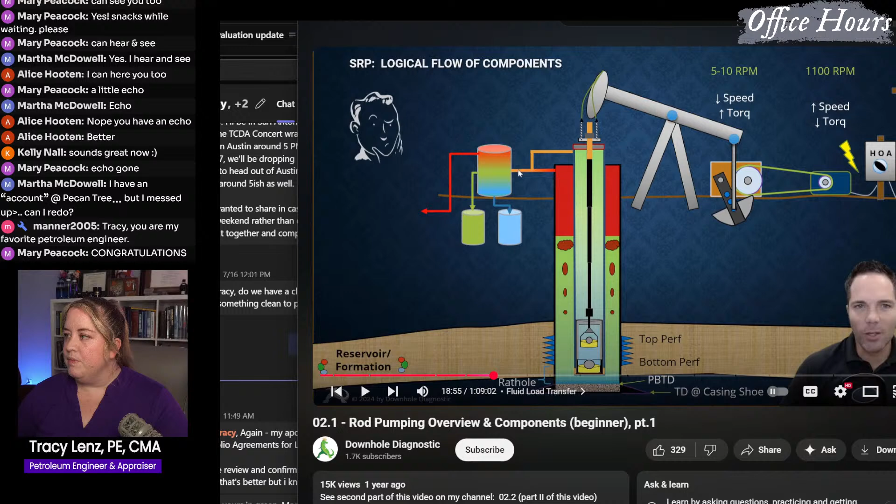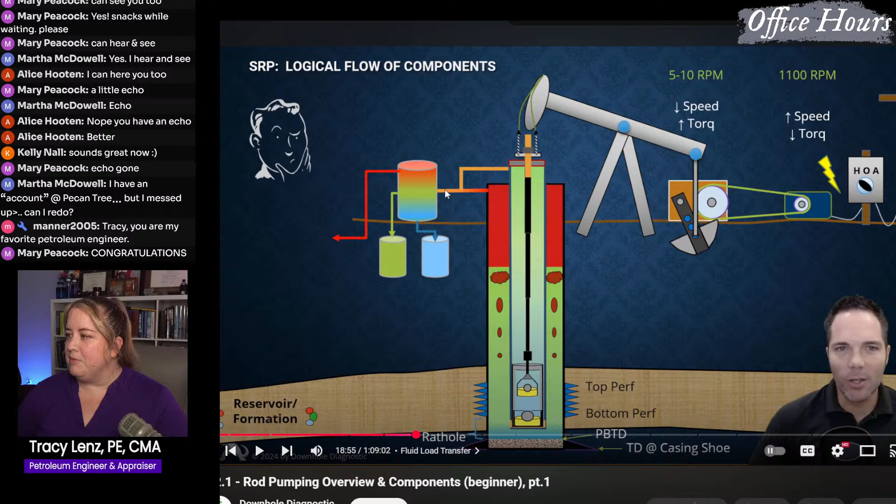Okay, so let me just arrange this. This is from Downhole Diagnostic, that's the name of the channel this is from. I'll keep that little thing in the bottom just for credit purposes, but this is the highly technical version, and I like some of their diagrams so I thought I would go ahead and show it.

Let's see, just so y'all know what we're talking about, if you've never seen it before, I'm going to mute him so it doesn't show up. This is the pumping unit we're talking about. This is a particular type, but there are a lot of different types. Here's an animation.

If you're driving around, you might see this along the highway a lot of times. If you're driving from Austin to Houston, around Bakersfield, California, Oklahoma, anywhere in West Texas, you're going to see these things. These are pumping units. I hear a lot of people call them rigs, but they aren't rigs, this is a pumping unit.

Sometimes they're also called a rod pump, a pump jack, horse head, beam unit, artificial lift. There's a lot of different names for something like this. Reciprocating rod lift is apparently another word for it.

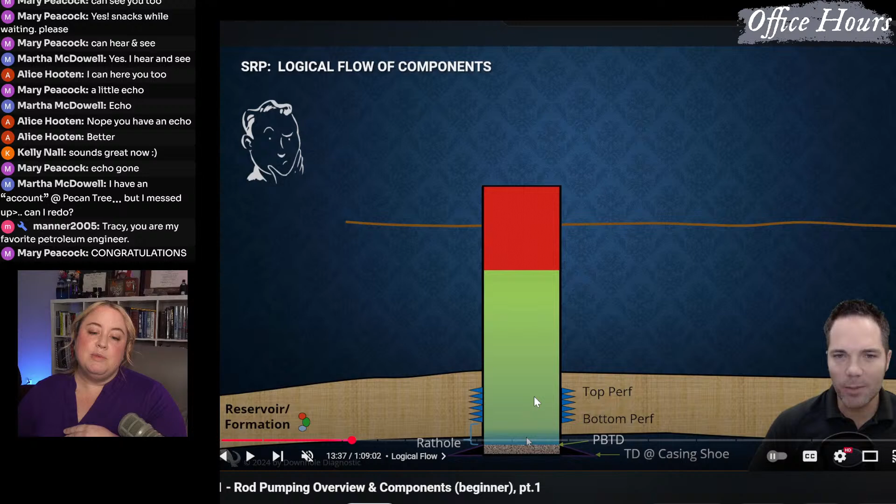So the problem is that this oil is too heavy to get to the surface on its own. It's not just going to magically start gushing unless there's enough pressure behind it to push it up. A lot of times you do have oil gushing to the surface, like in Beverly Hillbillies, because it's either really close to the surface and doesn't need a lot of pressure, or there's a lot of gas in the fluid, and gas is super light.

If you think of opening up a Coke bottle, you shake it and open it, it's going to burst, stuff starts gushing out of the top because there's more pressure in there than the stuff around it is able to hold in, and once you pop a hole in it, it's going to start gushing.

But not every reservoir is like that. And especially if you continue with the Coke bottle analogy, if you let it slowly release that initial part, the entire bottle is not going to be empty when it stops gushing. Maybe the top 10%, 20% of the bottle will be empty, but the rest of it will still be there.

So in order to get the rest of it out, if you can't move the Coke bottle, because in this analogy that's the earth, right, you can't tip the earth over, the next thing you might do is put a straw down there. You put the straw in and you're able to suck up the Coke, and that's how you drink it. I guess that kind of gives away that I'm from the South, calling every soda a Coke, but I don't really drink Coke.

But that is what we're doing here, we have this soda, this box here. If you think of this box as being the soda bottle that has already been popped, all the pressure's off of it, and now you just have this soda bottle sitting there, with the gas on top of the liquid, and you're trying to get the liquid out.

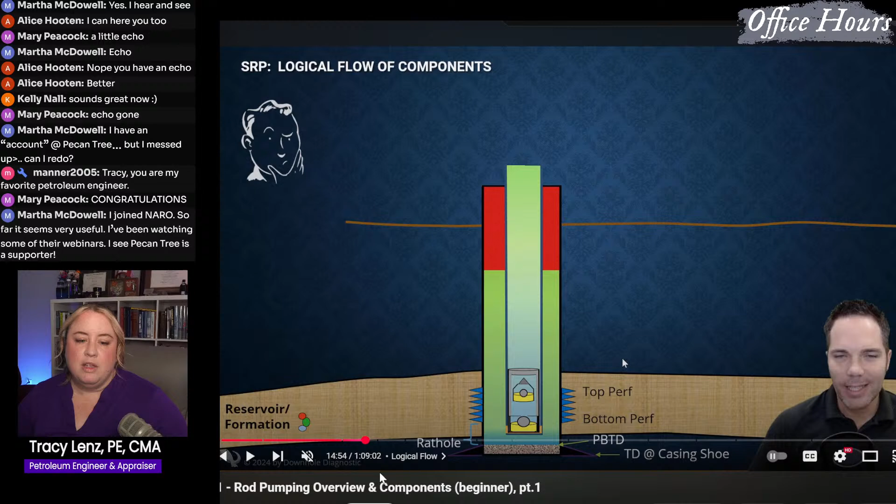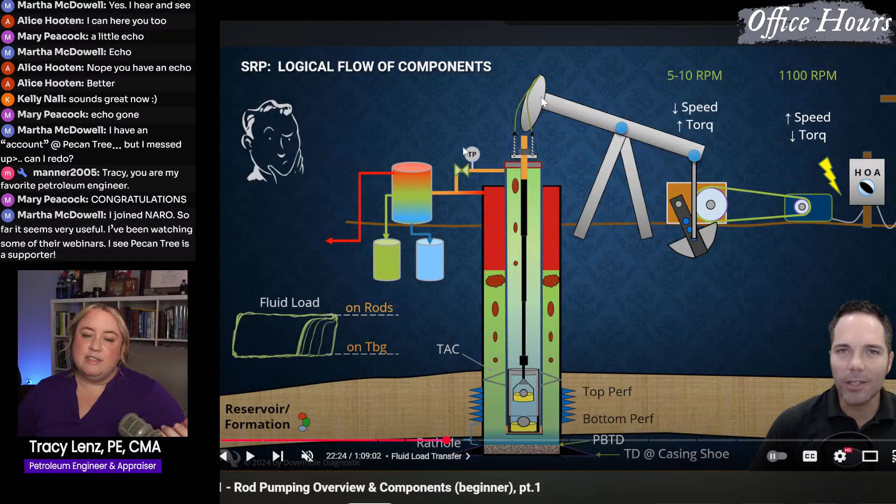So let's see if, I think I did see an animation. Here's everything all in there. So what this is doing is when the horse head goes up and down, and that actually is called the horse head because it looks like a horse, it is moving the entire string of rods that's going down into the ground and down to that pump at the bottom. It's moving all of that.

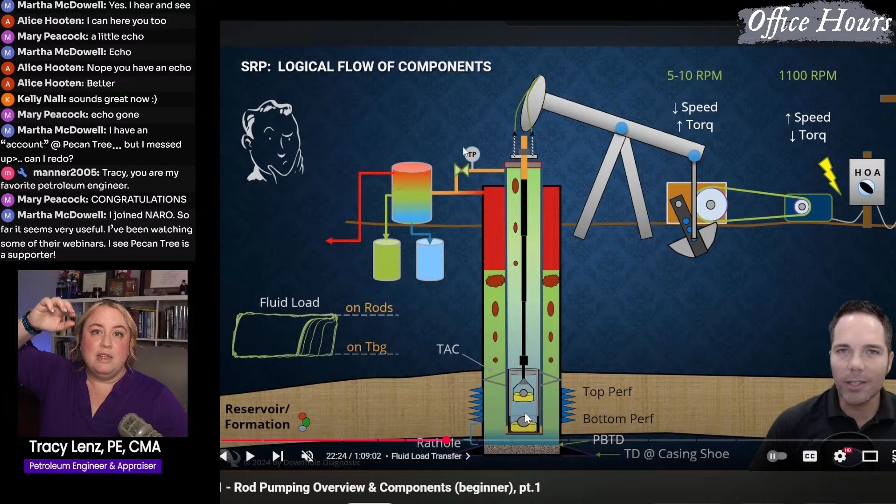So there's like 10,000 feet of things moving in the ground sometimes. Sometimes it's only a couple thousand feet or 1,000 feet. Usually the bigger this horse system, the bigger the pump jack is on the surface, the more it's moving, either more fluid, more weight, or both. And the smaller it is, that usually means it's just coughing up a little bit of fluid now and then, those little tiny ones that are smaller than a Volkswagen.

So you want to put it down into the fluid. This is moving up and down, suctioning up liquid every time it goes down into this pump. It suctions up more liquid, which comes up to the surface and goes to the facilities that are at the surface that you can see.

Here's the pump jack, usually connected to a motor, which is the thing moving this. Usually these things are electrified if it's in a very populated, lots-of-wells area. But if it's out in the middle of nowhere...

For example, there's a guy on YouTube who, if you found this video, you might have found his stuff too. I think his name's Zach, but he's in Oklahoma and he maintains his own wells. I bet most of his stuff is not electrified, there's not power lines going out to it, so it's just running on a generator, burning fuel to run an engine, kind of like just having a car idling out there.

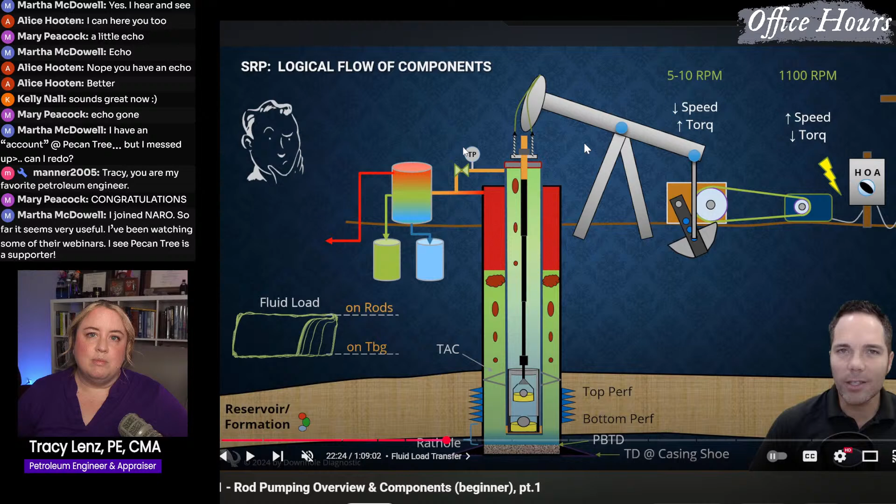So you can run an engine in multiple different ways. If you're getting really big electrical bills and you're a working interest owner, that's probably because there's electricity running a pumping unit or another type of artificial lift. Some take a lot of electricity, so that's probably what it's going to, the stuff to get the fluid up, if you see an electrical line item on your statements each month.

I think I saw an animation. Gotta find where the animation happens, because it's him pausing a video within me pausing the video. Here we go. So it pulls it up.

There's these little balls in these pumps that, when one pulls up, the one opens, and when it pushes down, the other one closes. So it's kind of interesting how those balls can seat, and that's how it's pulling it up, the balls moving around within the chambers.

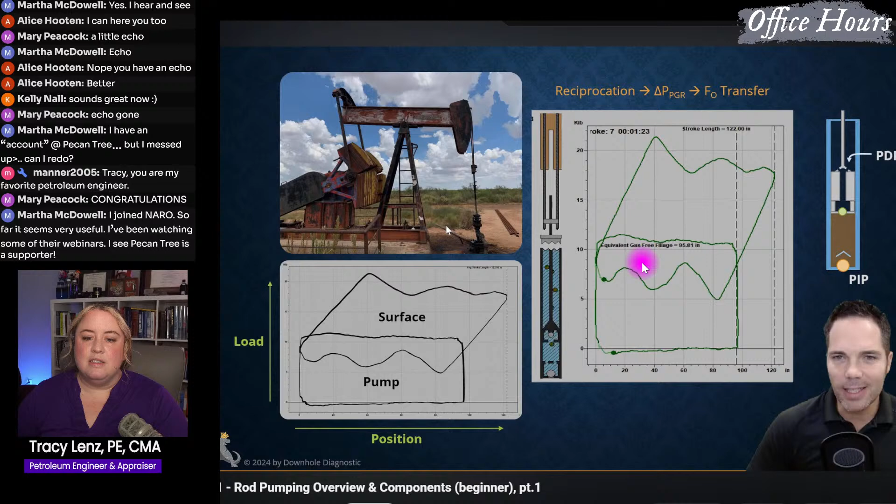You can see what they're showing here, this is how people going out to the wells can tell what's going on. They look at these, the cards is what they call them, and they can tell what's happening down hole. It's actually pretty interesting.

Here's what the tubing looks like that's going down, a string of solid iron going in this tubing. There's casing, which is the big one. The casing protects the earth. The tubing protects the fluid that's going up to the surface from the stuff that's not going up to the surface, if you want to think of it that way.

And then the rods, there's nothing inside a rod. If you were to take one of those straw cleaners and clean out a straw, the tubing is the straw, and the straw cleaner is the rod. It goes down in it, and then it's used to move stuff up and down.

These are normal sizes, y'all need to know that. Here's what the rods look like.

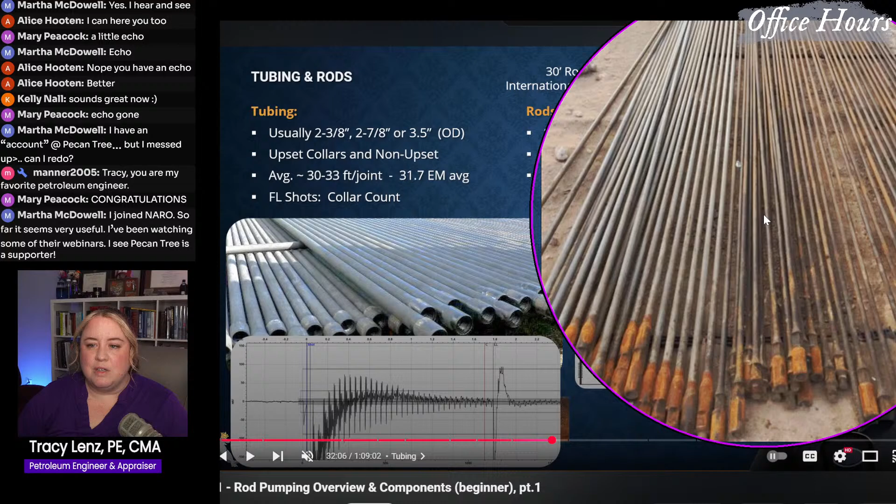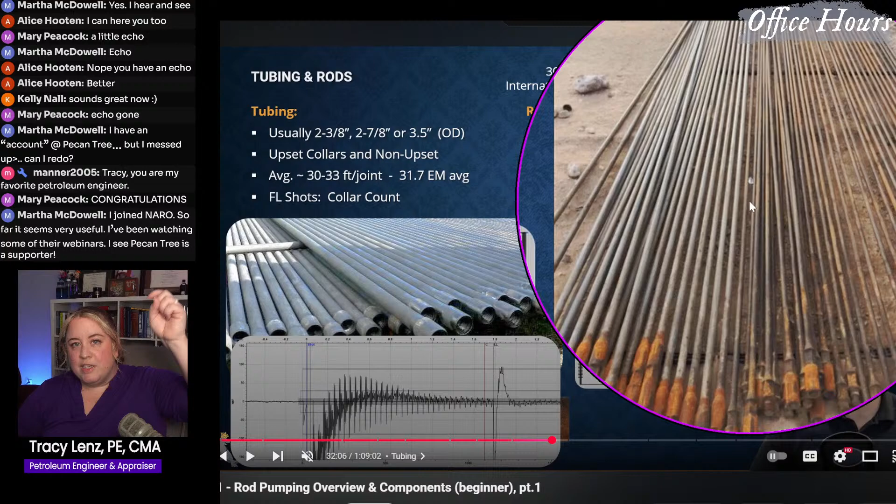If something breaks, it's usually a rod, because you have a little thin piece of metal going down thousands of feet into the ground, continuously moving up and down in a piece of tubing that's not that much bigger. So this piece of metal can rub a hole into that piece of metal, and then fluid won't come up efficiently anyway. There's a lot of things that can break along this.

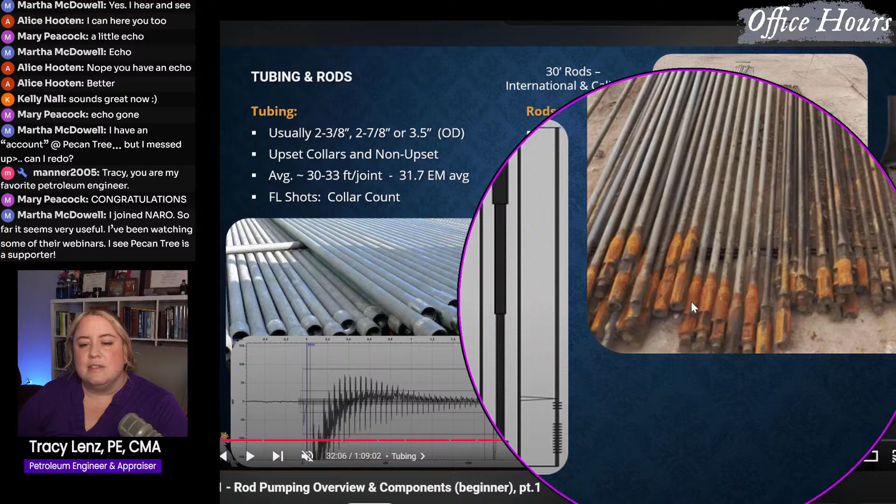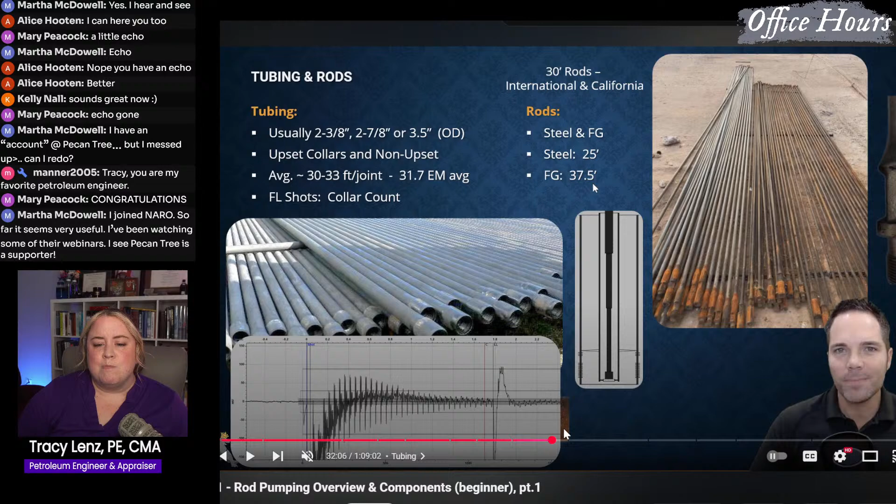A lot of times these joints that are rusted, they make them really thick because they take a lot of stress—that's just two screws screwing together, right? A lot of stuff can happen. Things can come unscrewed, things can break, the threads that hold them together can break. There's a lot that can go wrong with rod pump wells, a lot of moving parts that can break.

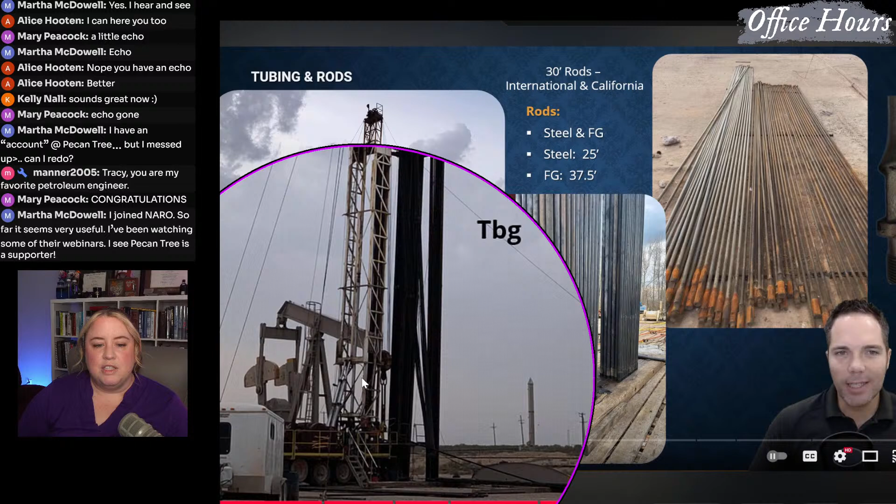If you see this type of truck out on your location—let me move this over a little bit here—this is a workover truck. It kind of looks like a fire truck with a really tall ladder.

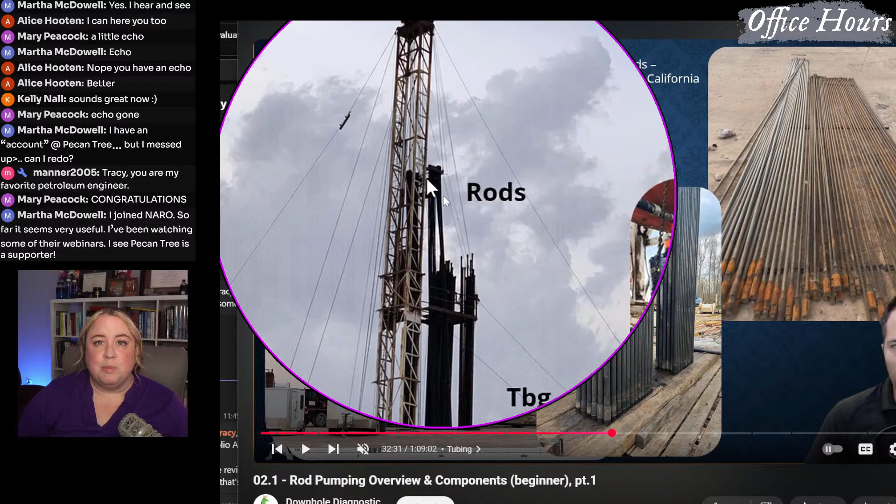A lot of times people get this mixed up with a rig. It is a rig, okay, it is a rig. A lot of times people think this is a drilling rig, but if it's connected to what looks like a fire truck, then it's just probably a workover rig, and they're just fixing something—they're not drilling a new well, they're fixing an existing well.

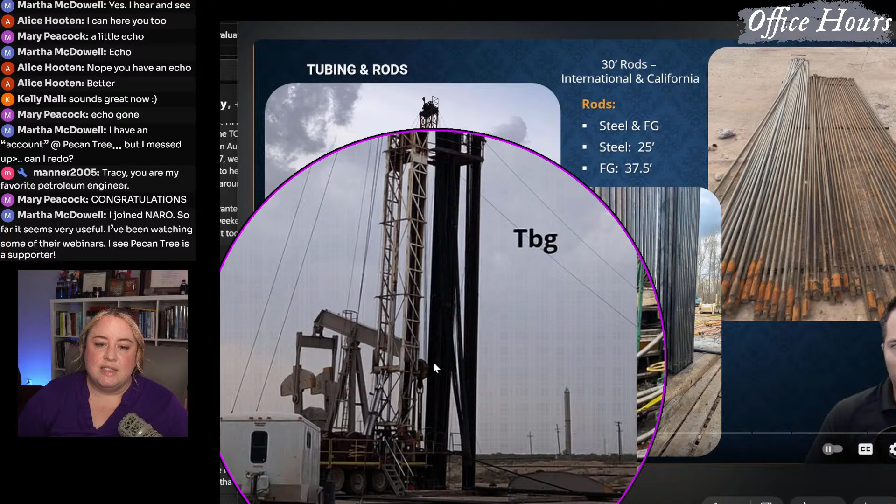So this is a rod pump well either getting installed or fixed, and they stack up all those pipes next to it, and that's how they get it in the ground. Let's see, yeah, tubing, rods.

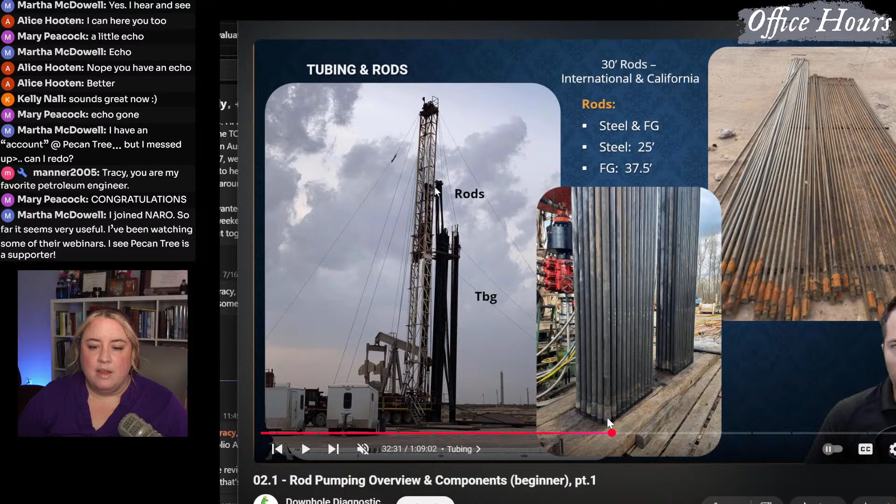What else we got here? Ooh, is this a video? A video of a video within a video. Hopefully this is interesting to y'all.

I always thought that rod pumps were really interesting. Fun fact, I'm actually co-authored on a research paper that involves rod pumps and neural networks, and it was with the University of California, University of Southern California. It was with their research department and with Chevron.

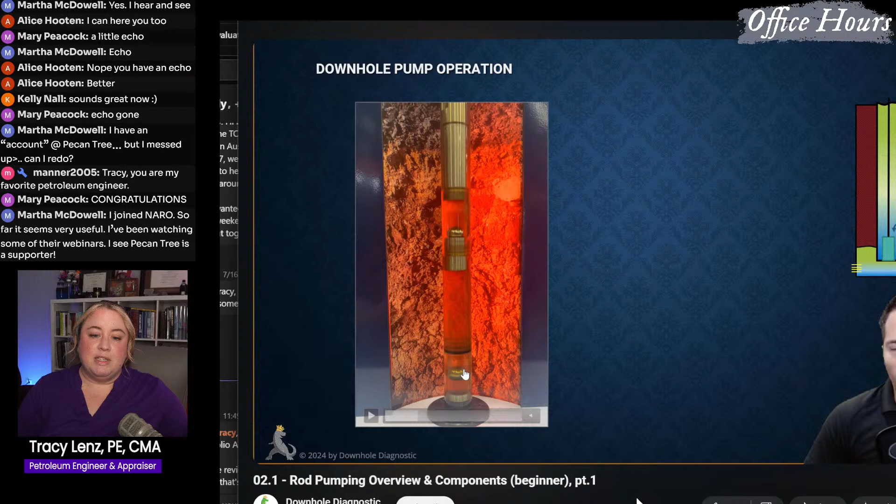We were doing a research project to see if we could predict the failure of when these things would break or when something would happen, based on very subtle hints that you could see ahead of time, using artificial intelligence - very early day artificial intelligence - to come up with a prediction of that and give the pumpers alerts. The pumpers are the people taking care of the wells out there. If you can give them something they could do, like, hey, something's happening that's going to eventually cause a hole to form, then sometimes you could give them things to do, like you need to slow down the unit, you need to change the timing, you need to proactively go out and replace it before you get a hole or before something gets very difficult to change. That was what I was working on for a couple years.

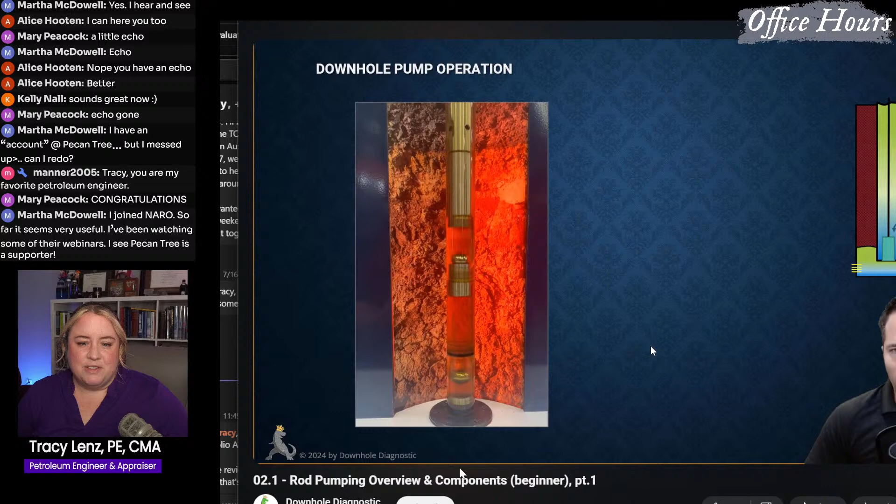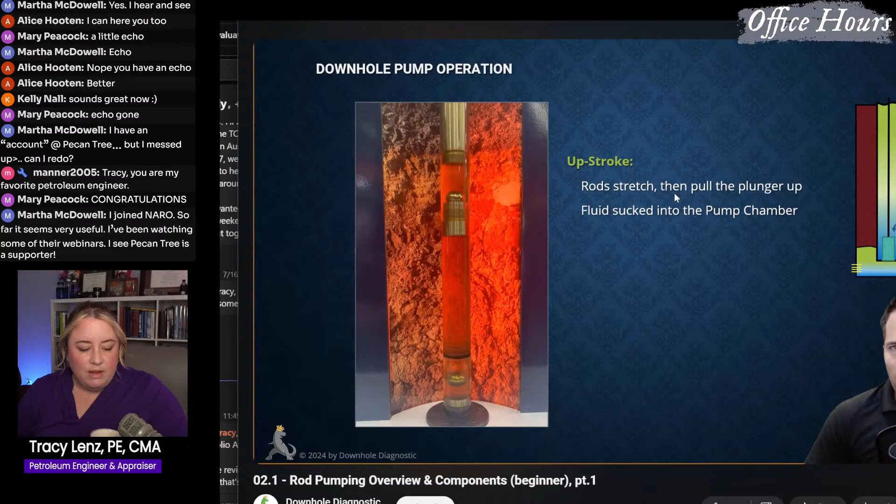Yeah, that was a fun project. That was also out in West Texas, where the pumping units were only producing from like 2,000 feet deep. So it was really fast and easy to test things and do things. And there's so much automation on those wells. Nowadays more wells have that also, but that was back in like 2010.

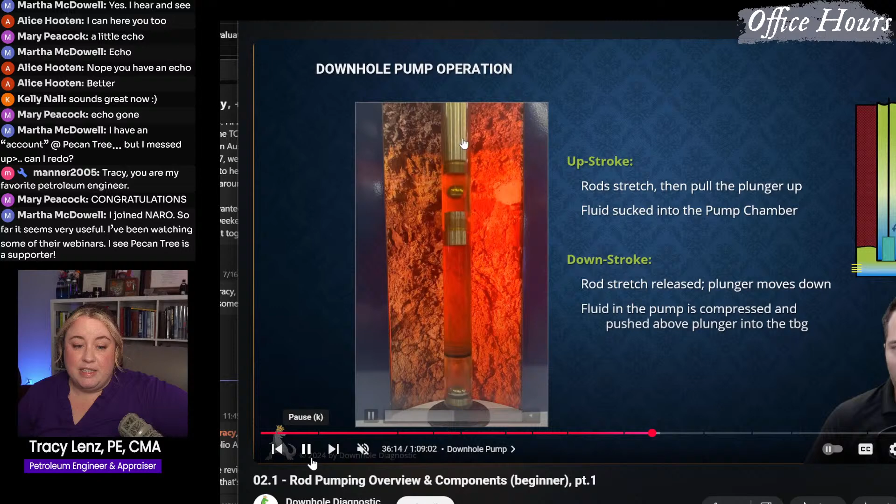So, yeah, I just think these little animations are fun. I could just sit here and watch them go up and down. I'm also, if y'all want to ask a question, I do not mind answering. I'm just sitting here watching a rod pump animation, and I will keep chatting until someone asks me a question. But until then, y'all get to learn about pumping units.

Let's see, we also have - there were some other things in this video I liked that he did. Yeah, you have the motors and the drives.

Okay, some of y'all might know of these things because riding the pump jack apparently is a thing in oil towns. Do not do it. It's very, very dangerous. But you give something that looks like a horse to a bunch of teenagers, and they're going to try to ride it. But don't.

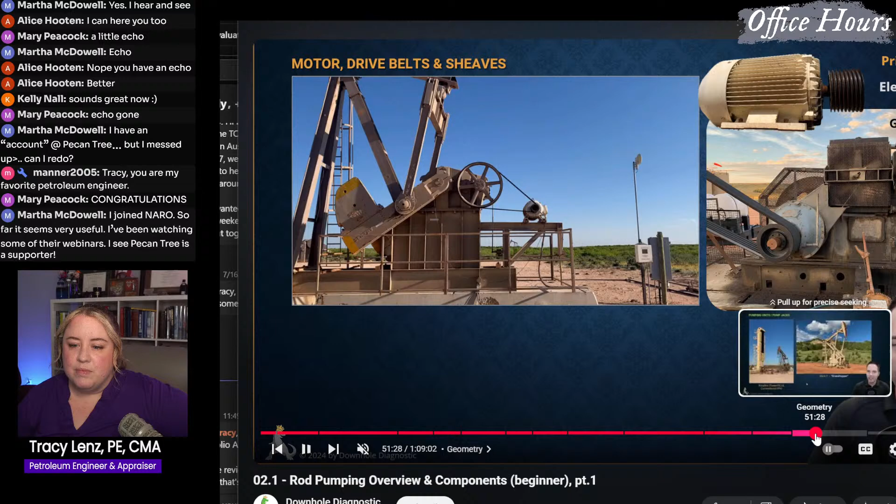This is what I want to show. So there's different types of pumping units, and you might see these out in the field also as you drive. Like if you ever have to drive to Midland or drive around West Texas or Oklahoma - we have this here, this is a Rotaflex. So it has a very similar thing happening down into the ground, but the surface looks way different. This Rotaflex here has a really long, smooth stroke.

There's so many inappropriate things in the oil industry. It's so fun being a shy female out in the field, having to ask like what a nipple is, what the stroke is - like there's so many things. I was like, okay, it's fine, no one cares. We're just going to ask the questions. We're going to do the thing. But...

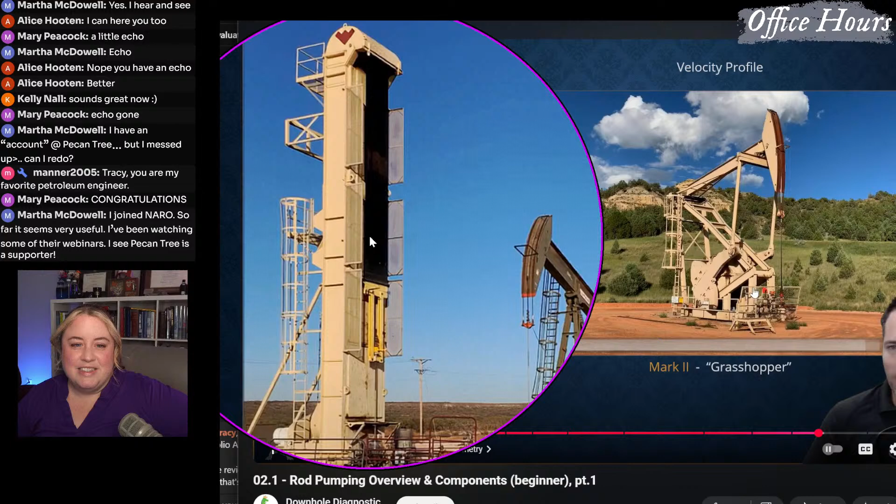Okay, we're still streaming, right? All right, so anyway, this is the Rotaflex. And these are kind of neat, but they're a little harder to work on, a little more expensive, but they don't break the rods and tubing as much. So that's one reason that they were installed.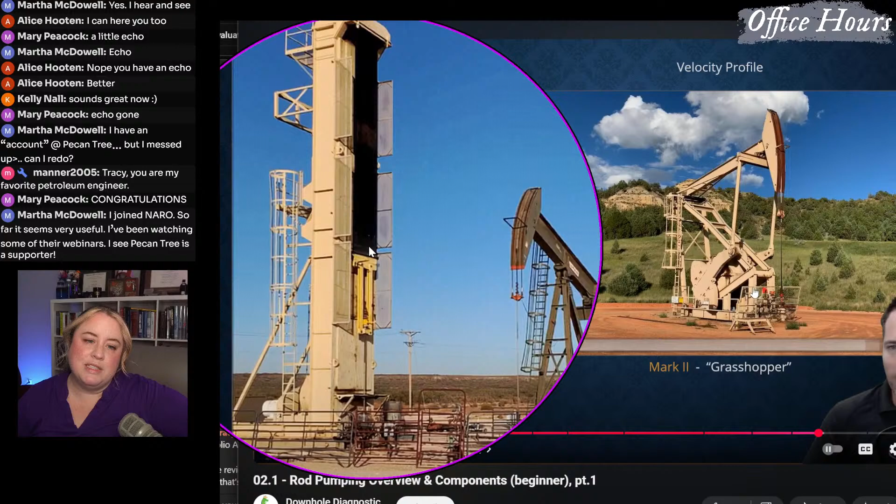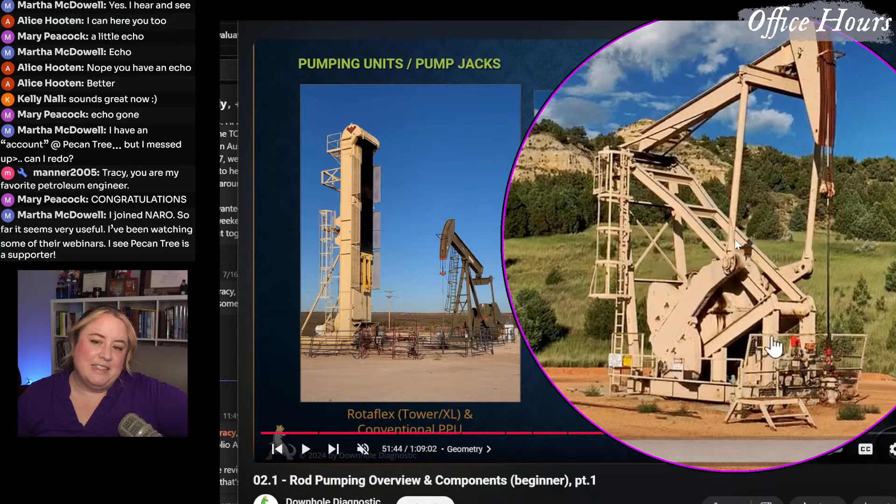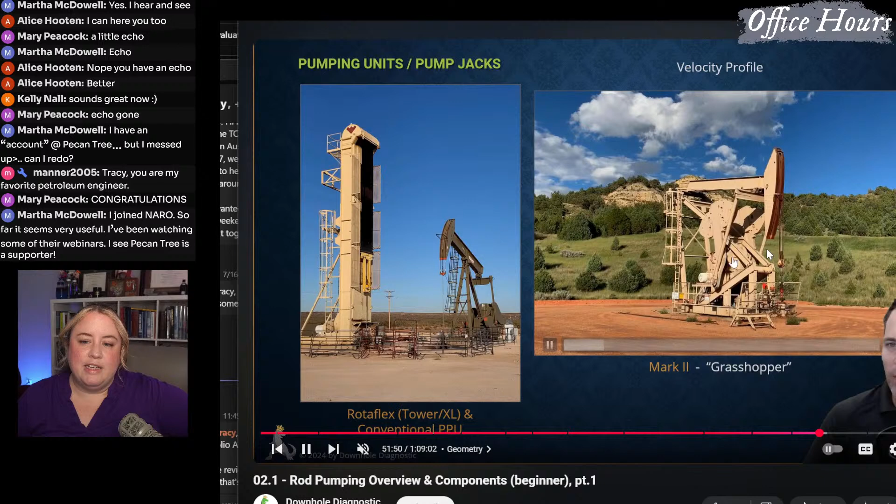And then you also have these guys, which is very similar, but I would always call them grasshoppers. Is that what he calls them here? Oh yeah, Mark II grasshoppers. Because they kind of just look like a grasshopper. They just turn the other way - if you think of one going clockwise, the other one's going counterclockwise. And if I show this, see, it's kind of going backwards with how it's running. That just puts different stresses on the rods as they go up and down. So there's pros and cons to both, but they're all doing the same thing.

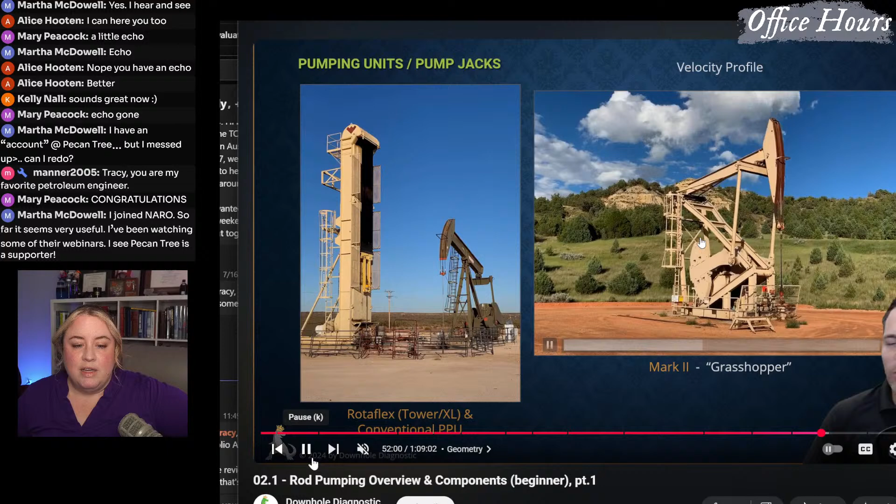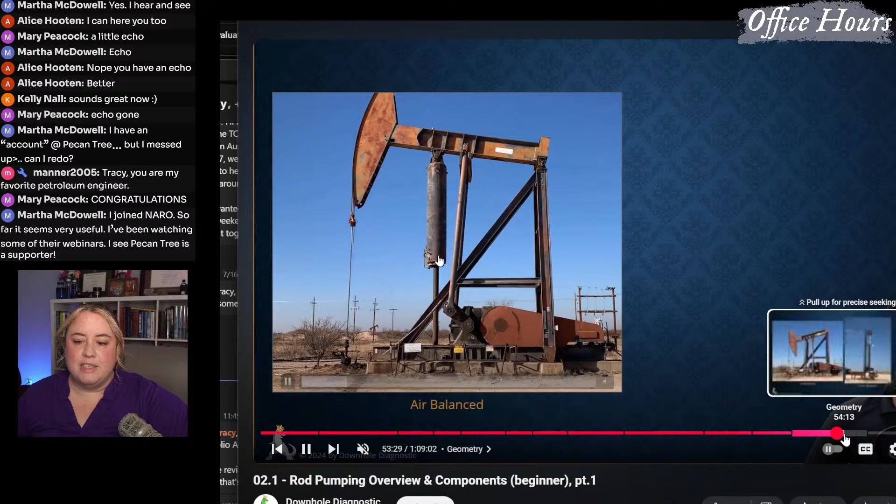There's even some that are - let's see, I think he has an image of this too - these, an air balanced one. So instead of having the big weights on the back, sometimes they have a big old piston of air balancing just to help it go up and down without hurting itself. Then there's even weirder versions of that, which is more like the Rotaflex, where it's just going up and down instead of circling, but the same idea is happening.

All of these are very similar things happening for similar reasons, just different examples of what you might see on the surface. You can almost see how this one kind of wiggles a little, but this is meant for really shallow production, like coughing up a couple barrels. Maybe you're measuring it in gallons at that point.

You also can put in some of these low profile ones. If it's in a place where you need crops to be able to be watered, you can get really low profile pumping units like this that can be put underground slightly. Then you're able to get those big watering things to go over the pumping unit, so you can use the land for both crops and for oil and gas production.

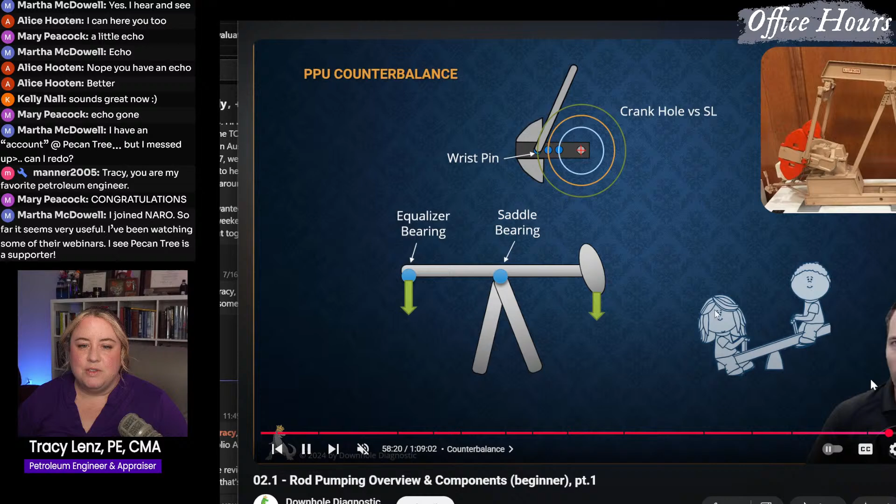Don't do that, kids. It is basically a seesaw. The problem, and the reason you don't want to ride a pumping unit, is these things start and stop.

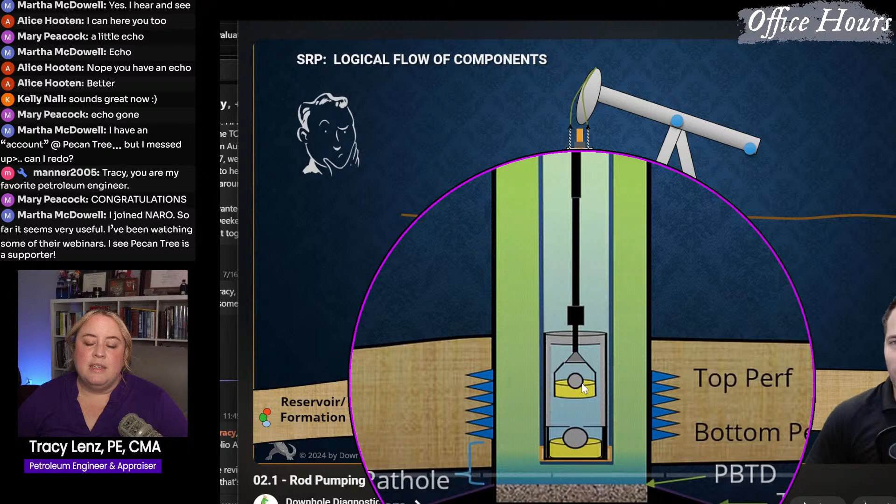If I go back to here, we'll just stay on this for a second. When they're producing, the fluid slowly - this is the Coke bottle analogy - it's slowly coming in. When you produce it, sometimes you're producing it faster than it's flowing into the well. And so this line between the gas and the oil slowly goes down as you're producing it faster than it can flow into the well.

If it gets down to this pump intake, where it comes into the tubing, then you're going to start pulling gas into the pump. If anyone has had a pool or a fish tank where they were trying to get water to flow from point A to point B, but there was air in the tubing, and you're trying to empty the fish tank or clean the pool, trying to get something to flow through, like draining a pool.

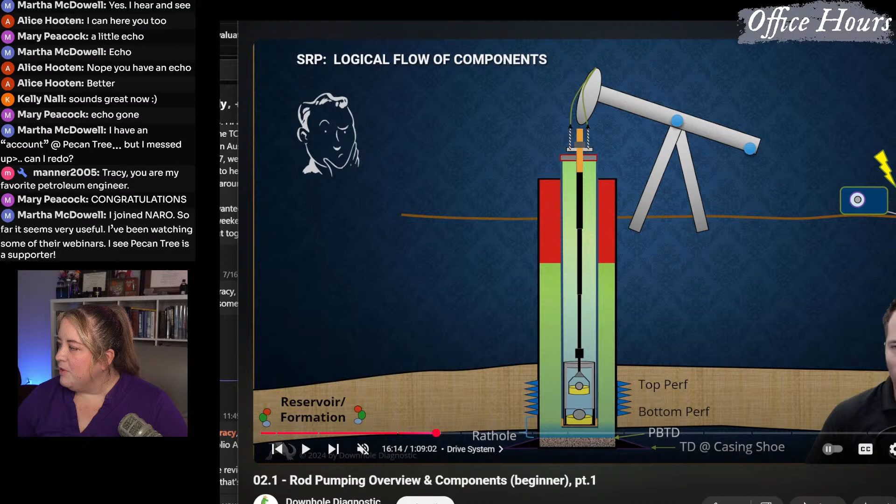My daughter has these little pumps in her shower, and when we first installed them - it's for conditioner and shampoo, like when you go to a hotel and they have those little things on the wall. When you start pumping the conditioner out of those little... let me get a picture of it. What do they call those? Shower soap pump dispenser? Yes, okay.

This type of thing, right, this is showing it. So my daughter has this type of thing in her shower because we were getting her these bulk supply bottles of shampoo and conditioner, and they were too heavy for her to turn over, but all the ones she wanted didn't come with the pump dispenser. So I was like, we're just gonna get these shower caddy things meant for Airbnbs, and we installed them with sticky stuff onto her shower wall, and filled them up with shampoo, conditioner, and body wash. Then this little pump thing on the bottom, you pull it towards you to dispense the soap - I'm sure we've all seen that at a restroom or something.

When we first put the shampoo and conditioner in there, there was air between where it comes out and where the shampoo and conditioner touched, where it was going to go out. So every time we pulled the little thingy forward, you were just compressing the air and releasing the compression, compressing and releasing, and nothing was coming out. So what I had to do was get some water down in there, using a chopstick to get water past the really thick conditioner into the pump. That filled up, the air bubbles went up to the top, and then it was able to pump the water out. Now we have a continuous flow of shampoo and conditioner.

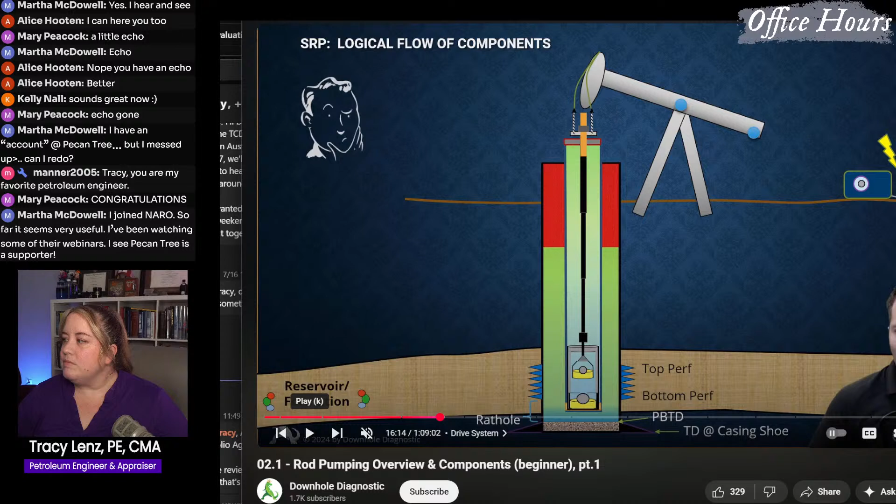If air gets into this little pump, you're just going to compress the air, release the air, compress the air, release the air, and nothing's going to move. Nothing moves up, and so you start producing nothing. You start damaging things, because if you think of how heavy all this stuff must be, and then suddenly you just have air in here, it just falls down through the air and pounds.

That's really damaging, and you want to allow time for this to fill back up above the pump. Ideally it stays at a certain level above the pump. So they have these things called pump off controllers that you time it to where it pumps off just long enough for this to go down to a certain level, then it stops, lets it fill back up, pumps down a certain level, stops, fills back up, and does it over and over again.

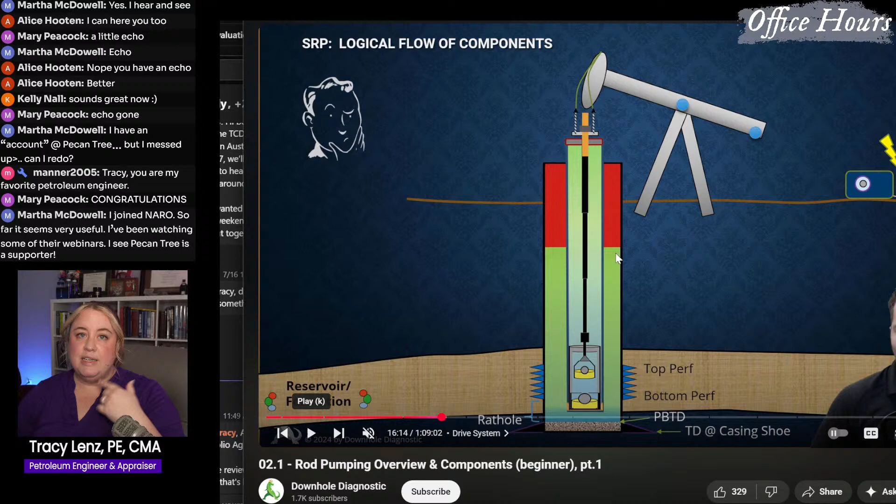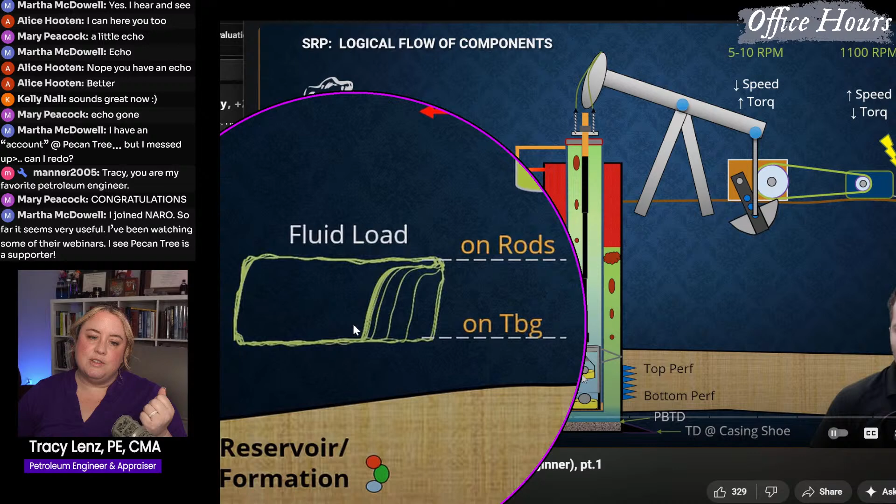All of this other stuff he's showing, like this over here, this is a pump off card. This is how they know it's starting to fill up with gas or air, and then they turn it off based on once this line gets over to a certain part. It fills back up, pumps, turns it off, fills back up, pumps, turns it off. It does that over and over again, sometimes automatic, sometimes on a timer, sometimes calculating dynamically based on the well. But sometimes that can be a day between it turning on and turning off.

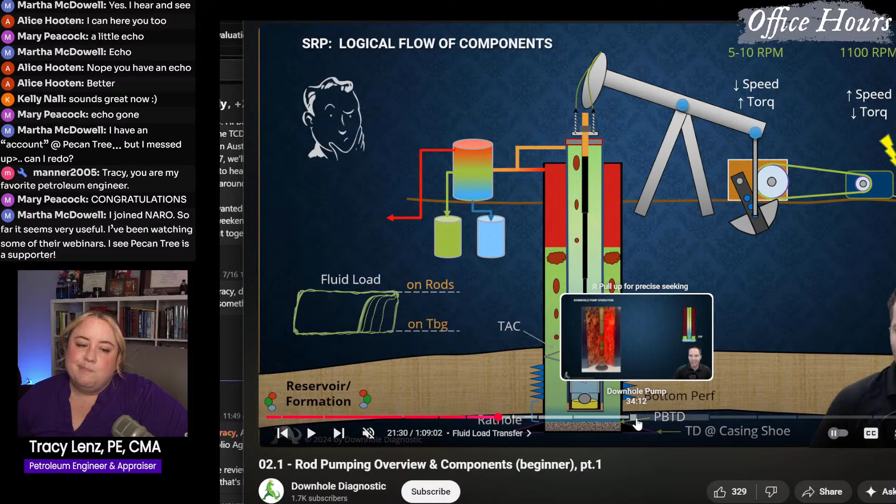Martha, so you say you joined NARO. So far it seems very useful. I've been watching some of their webinars. I see Pecan Tree's a supporter. Yes, we are, we like NARO. It's been a good match for the people we want to serve and the people who can use our services. I also really like the people who put it on and their heart behind it. I don't know everyone's heart behind it, but for the most part, I like all of them.

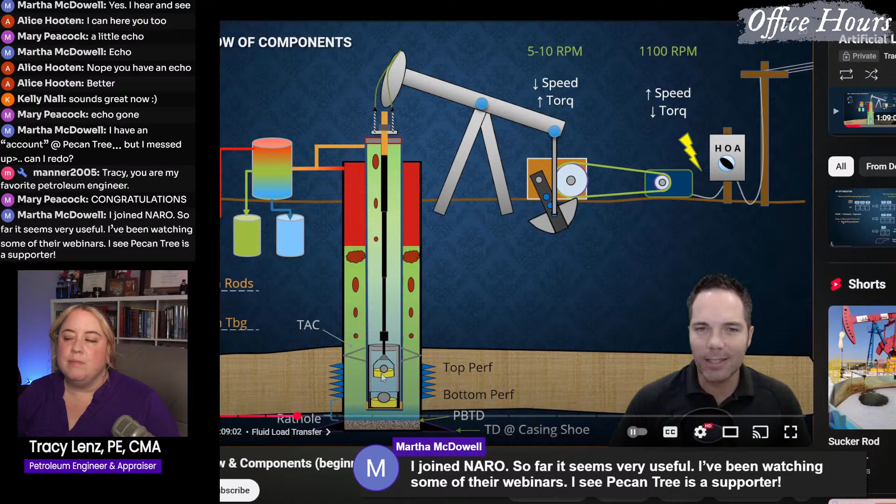Oh, the guy I can actually show. If y'all are interested in more—oh wait, wrong one. If y'all are interested in any of this oil and gas production stuff, the guy I was talking about before, who, you know, I don't think this is.

Let me see. I think a lot of people romanticize the idea of operating and owning their own wells. And I think that this is a much more accurate representation of what's actually happening. Let's see.

Yeah, this guy here, the Zach Life. Let me get rid of this thingy. So his, the Zach Life, is his YouTube handle. And it's this guy in Oklahoma—I think him and a couple other people own several wells. I won't play the audio because I'm pretty sure that would get me demonetized, or get a copyright strike or whatever.

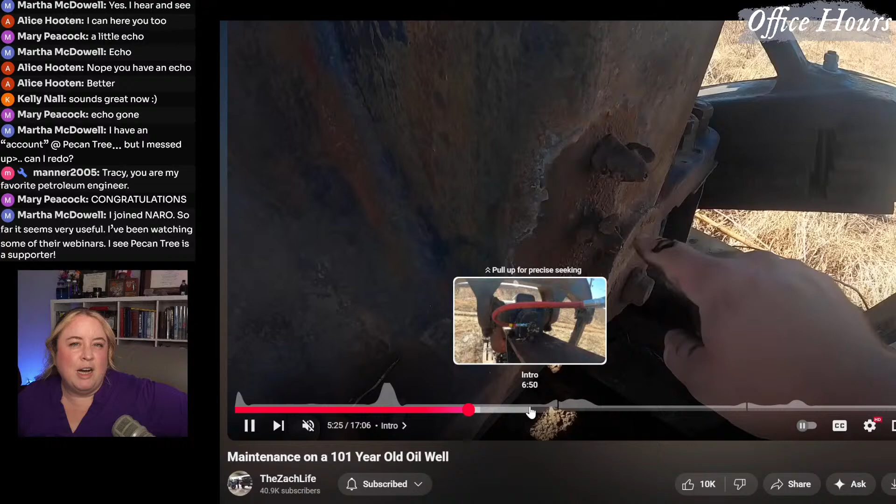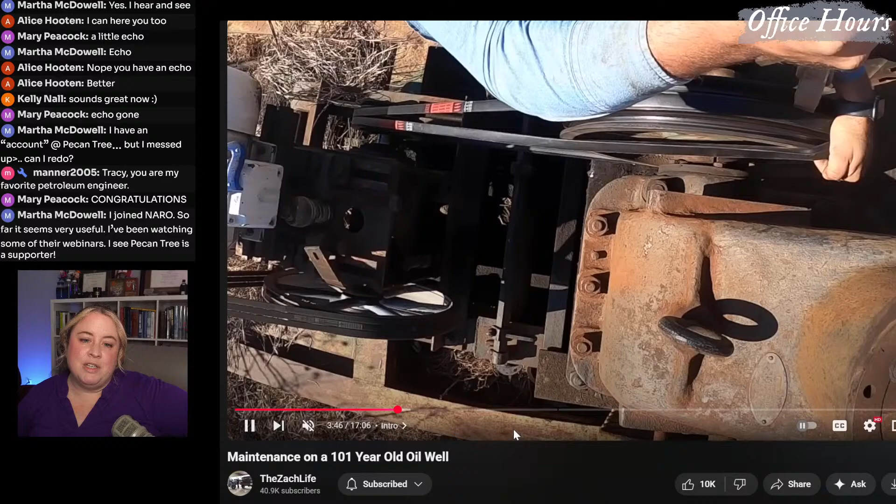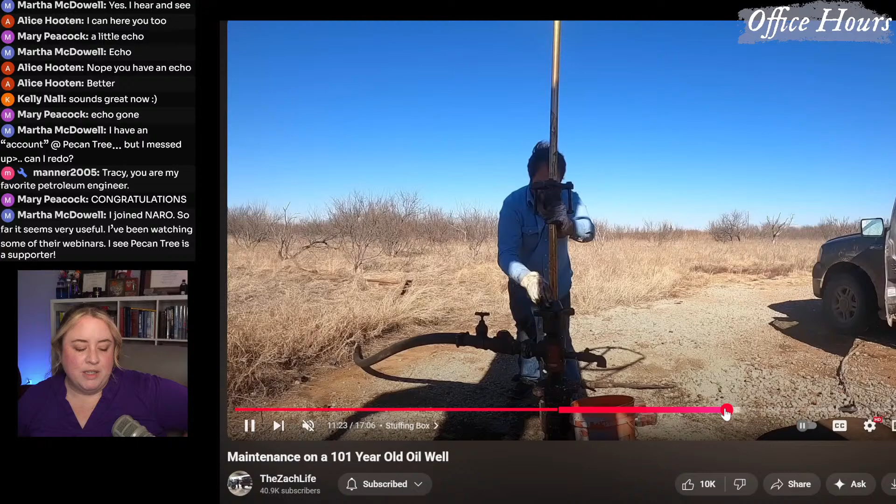But it's kind of fun. He shows the more real-life side of what a lot of these oil wells end up turning into. The new ones are nothing like this—it's never hard to maintain a well that produces a lot when you have all brand new everything. But those guys in the field—if you're even remotely considering operating your own wells, owning your own wells, or having a working interest where you're actually operating, just watch this channel a little bit to really get a feel for all that goes into it, because there's a lot, and I think it's relatively accurate to the field stuff that I saw when I was out there.

The production engineer is usually in the office, and then the pumpers and the field crew are usually the ones actually doing the work. I think almost any engineer that's worked on the production side can tell you they're the ones really helping diagnose what's going on, and you're more doing what are the options, what are the economics, what's the potential, and working with them to figure out how to make that happen. So it's something to really consider if you're thinking of doing this yourself.

Okay, I have a quiet crew. Sometimes y'all are real chatty, and I'm sorry, I didn't mean to make fun of y'all. I will stop, but...